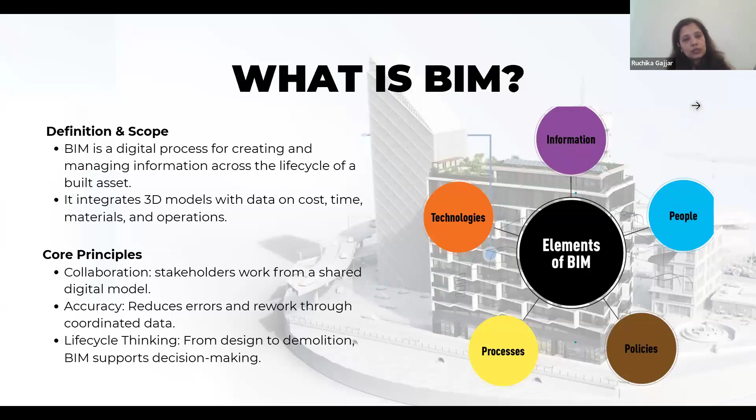There are people who ask, is BIM a tool? Can we buy BIM? Is it just a technology they can plug in and start? No, it is not. It is a process, and this process manages information throughout the life cycle of a project, from the concept to the finishing, or you can say up to the facility management level. It integrates a 3D model with data on cost, time, materials, and operations.

The core principle of BIM is collaboration. In earlier times, as you all from the AEC industry understand, teams used to work in different stakeholder groups involved in the project lifecycle — architects, surveyors, QS, civil and structural engineers, mechanical and electrical engineers, contractors. A number of stakeholders work on a project, and everybody used to work in their silos. BIM is a collaboration tool, or a process, which brings all of them together.

So collaboration is the core principle of the BIM process. Stakeholders work from a shared digital model, improving accuracy and reducing errors and rework through coordinated data. What it means is, when you work in silos, if some changes have been made by an architect and the QS or other team members did not notice, they may be working on a model shared earlier without up-to-date information, and the accuracy is challenged.

There have been times we've come across projects where changes were made in the project lifecycle, but when it reaches the site, the contractor is still using the old model or old drawings. That's when we notice these changes were done, but at implementation time on the construction site, we are not utilizing the correct data, and it brings errors, costs time and money, causes delays, and back and forth issues.

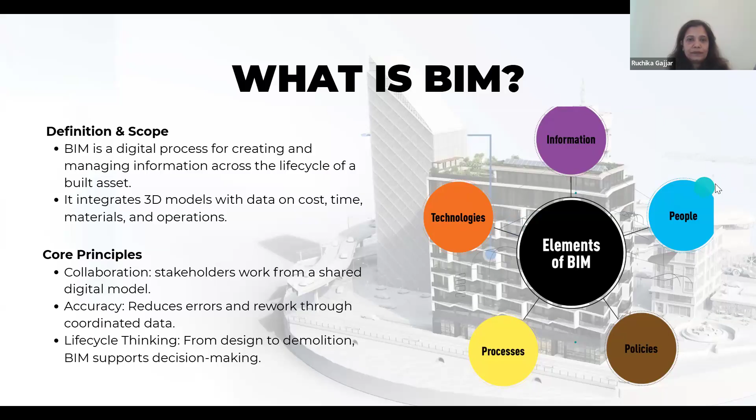BIM's evolution — I'm sure some members here would understand how 2D drafting transitioned when CAD or AutoCAD came in the early 90s, and some of us worked on AutoCAD. So there was a transition from 2D drafting to 3D modeling with integrated data over decades. We are very much familiar with 3D data and 3D tools or modeling now. This addressed inefficiencies and errors in traditional construction practices, and now BIM is a global standard in the construction industry.

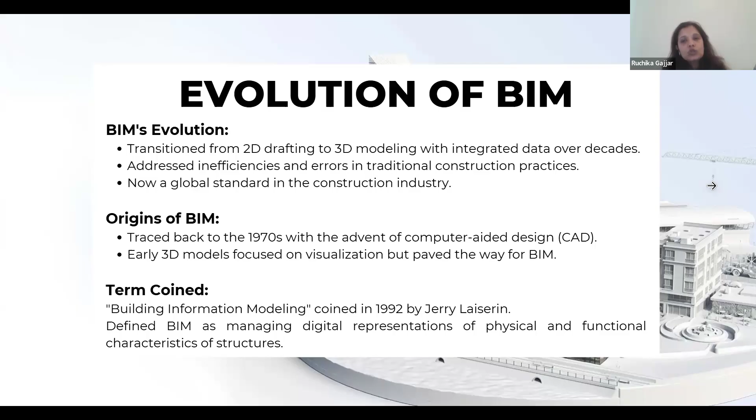The origins of BIM trace back to the 1970s with the advent of computer-aided design, CAD. Early 3D models focused on visualization but paved the way for BIM. What it means is, from 2D we liked the idea of 3D because 3D gave us visualization.

Most of our clientele are non-technical people — the developers, or the people investing, are non-technical — and 3D modeling brought an idea where they could visualize. Whether we are presenting as an architect, or any stakeholder of the project — QS, surveyors, architects, engineers — we all used that 3D model as a very good visualization tool for non-technical people, investors, and developers.

But it paved the way for BIM, because without the 3D model or the 3D tool, we don't start the path of BIM. So 3D modeling was initially key, and then it paved the way for BIM for us at this point in time.

The term building information modeling was coined in 1992, defining BIM as managing digital representations of physical and functional characteristics of structures. We will be explaining that as well. Next slide, Eric.

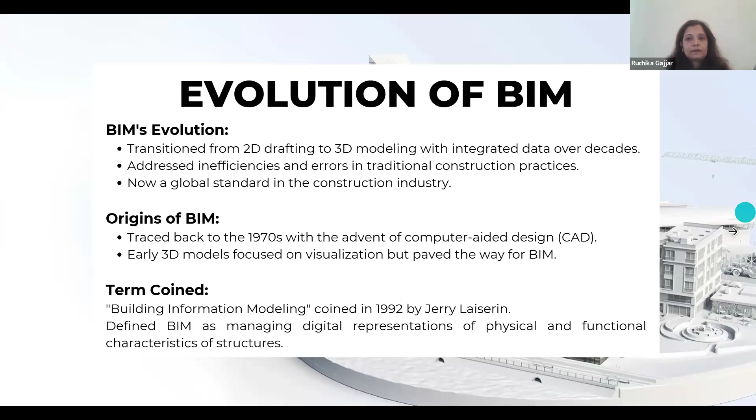Standards and best practices for BIM evaluation. Why do standards matter? They ensure consistency, reduce risk, support legal compliance, and facilitate collaboration across disciplines and organizations.

ISO 19650 is an international standard for managing information in BIM projects. I'm sure you've seen different standards like ISO 9001 and others, these are international standards. For BIM projects, we have the ISO standard, which is 19650. You can always Google it, there's a lot of information available on these standards, and best practice is to understand how it has been used internationally for BIM implementation on projects.

A key concept in ISO 19650 is the information requirement, EIR, employer information requirement. The employer is the person who owns the project. It's very important as a BIM manager to understand the employer, what the developer or investor or project owner requires. The BIM manager plays a role in understanding, since they're often non-technical people, what their needs are, what they want to do, and what the purpose of their project is. We call this the EIR.

We also have AIR, the asset information requirement, and PIR, the project information requirement. These are the information requirements, the standards we follow from ISO 19650.

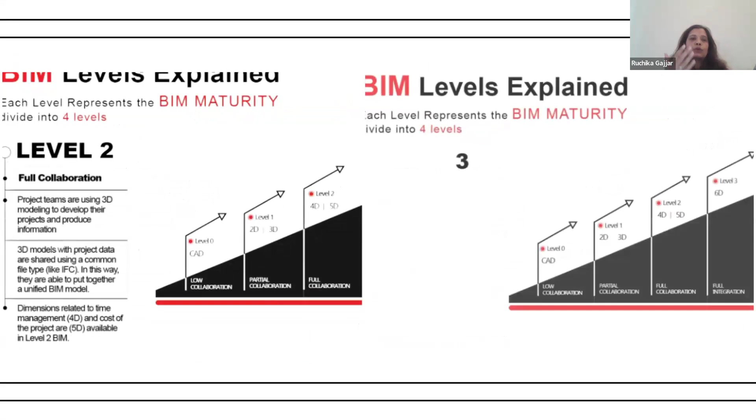All this that I just theoretically explained about the CDE, Dennis will show you in the demo of one of the CDE environments how the work in progress, collaborative, shared folders, and naming conventions are all used.

I think Eric, you've gone ahead. I was on before the slide. Yeah, BIM levels explained, I don't know why.

BIM levels explained. BIM levels refer to the maturity and collaboration stages of BIM. We have level 0, level 1, level 2, low collaboration. Eric, next slide please, I'll be able to explain there.

Level 0, which is low collaboration. Information is produced with 2D drawings using CAD. Files are shared digitally as separate sources of information. Many of us in Kenya are still using this. What does this mean? When using AutoCAD drawings, if you've worked on AutoCAD you'll understand it's a drafting tool, not a design or modeling tool.

In AutoCAD, anything you draw does not have properties. What I mean is a line is just a line, you cannot say that line is a wall, it does not have that property. It's a drawing or drafting tool. At the moment, we are still sharing our drawings through WhatsApp, emails, PDFs, or even Dropbox. That is what level 0 is, low collaboration.

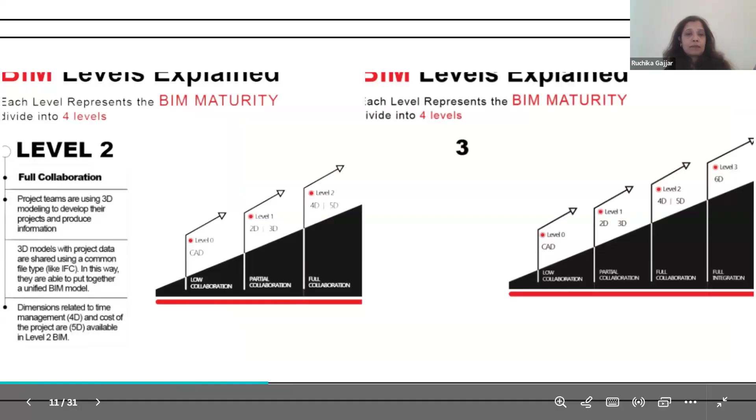Level 3, okay, on the slide somehow it's missing, I don't know why it's distorted. Level 3 integrates all project information, including 4D time, 5D cost, 6D sustainability, and 7D, which is facility management. So these are the BIM levels we have.

Next slide Eric. Now, BIM across the world. We have seen that currently many countries across the world have adopted BIM. We have the US, European countries, and we can see here UK. UK started in 2016, making BIM compulsory for government contracts.

Next slide Eric. So all these countries have already adopted BIM. Some have brought the BIM mandate for government projects, either based on project size or cost. Some countries are working towards BIM mandates and adopting BIM. These are the countries that have so far adopted and successfully launched it on some projects, like Malaysia, where for public projects, above a certain cost threshold, BIM use is mandated.

So that's how they have developed. Even in Africa, we can say Ethiopia is very active currently. They have not yet mandated that, but the Project Management Institute is working towards it. South Africa is currently working on it very actively. The AEC sectors and technology partners are joining in together. Universities are also working towards it. And even in Kenya, we are working on it.

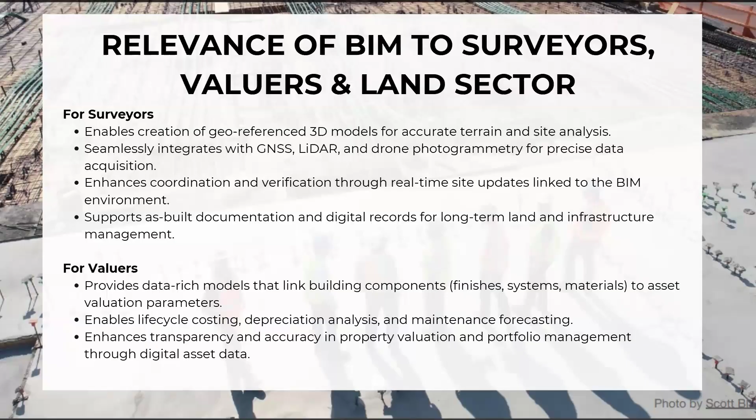Why do surveyors matter? We understand that a project fails without geospatial reference or accuracy. It can look good on paper, it can look good in the design software, but if you don't have the geographical reference, it will definitely fail because you cannot execute it, or there will be a lot of variations and changes on site due to inaccurate geographical references. This is where surveyors come in, providing the designer with the actual geographical accuracy for the project and the location to be executed. We usually see this in Civil 3D and other BIM software as well.

The ArcGIS GeoBIM will also play a critical role. Surveyors ensure correct location by controlling the levels and providing the correct levels even during site execution, which is where we usually get the as-built data as well. Accuracy in the early stage means less rework, lower cost, and faster project delivery. The fastest project is completed on time, and costs are saved, provided the accuracy and integrity have been maintained. So surveyors play a critical role in the early stage by providing accurate data.

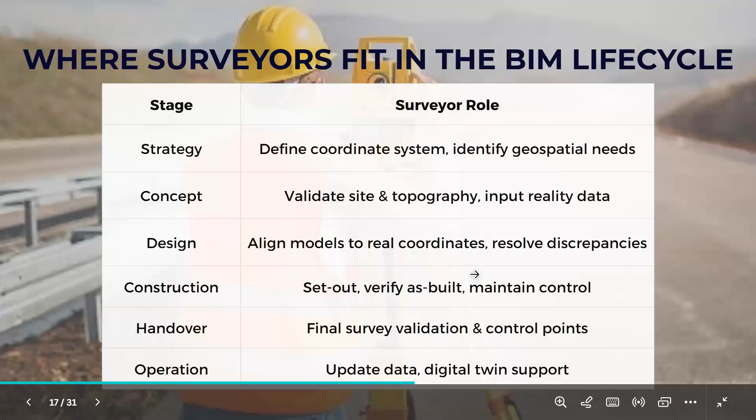At final handover validation, you have to validate the points and also the design versus your geographical reference. Then during the operation stage, as I said, in verifying the as-built, surveyors will also play a critical role in ensuring that we have the digital twin or replica of the existing facility.

In the BIM environment, we usually have a typical workflow which surveyors follow, revolving around data acquisition, data processing, BIM integration, and construction layout verification. This applies to high-end projects and also to as-built and asset information management.

In data acquisition, we conduct surveying, topography, boundary, and cadastral survey using GNSS and LiDAR scanners. That data can be linked into Civil 3D if you have the latest version, 2026, which supports that, and from there it can be linked to the common data environment. We capture high accuracy geospatial data through drones and terrestrial laser scanning, and also import survey data into BIM-compatible formats like ReCap, Civil 3D, and InfraWorks.

In data processing, surveyors help clean and process the point cloud data, for scan-to-BIM, and generate accurate surface models, digital terrain models, and site contours. This helps architects and engineers manage the site and contours for actual georeferenced data, ensuring alignment with architectural and engineering models.

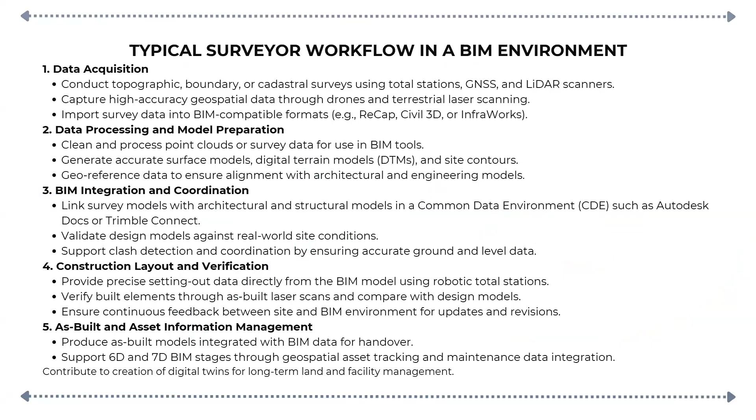When we take a case study from Kenya and the region, we look at Tenwek Hospital, one of the latest postmodern facilities done here in Kenya, in which we will look into how BIM was involved from the initial stage until the final stage, until the handing over, and who played what role in that project.

When we look into Tenwek Hospital, we understand that the Tenwek new cardiothoracic center used an international design team and BIM for the architectural, structural, and MEP coordination. Local execution included adaptation to site conditions.

We know that this project exists here in Tenwek, and we know that it's a cardiothoracic center. The funny part is that it was designed outside Kenya, or abroad, usually from the US at the initial stage, and the surveyors played a critical role in providing the actual geographical reference for that location for the designing teams in the US to do their preliminary design stage.

As we talk of BIM, the team didn't travel all the way from the US to come to Kenya and do their site verification or to know the actual site where the project exists. But with the help of BIM, they were able to deliver a project which came to success and is now a successful story here in Kenya.

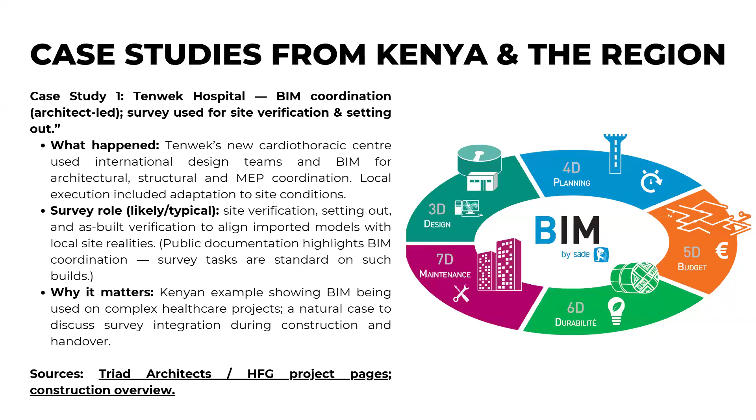Another case study comes from Konza Technopolis - Survey of Kenya establishing controls to enable BIM and GIS integration and future digital twin. Konza is Kenya's smart city, as we all know. Survey works, which involve the cadastrals and control networks, have been carried out by the Survey of Kenya to provide a reliable geospatial foundation for master planning.

The program is explicitly aimed to embed digital infrastructure and digital twin concepts, whereby the surveyors, from the initial stage, provided the cadastral and control networks for the designing team, ensuring the success of Konza City planning. The main roles include establishing horizontal and vertical controls, and cadastral engineering surveys that will enable future BIM and GIS integration and digital twin development.

Why it matters for us: this is an example where national land surveying underpins city-scale BIM, GIS, and digital twin ambitions, and serves as a strategic example for early survey involvement. These case studies help us understand the critical role surveyors play in BIM and the AEC industry, how BIM is being integrated with ArcGIS GeoBIM, and the digital twin ambitions, whereby a planned facility can have a digital replica of it.

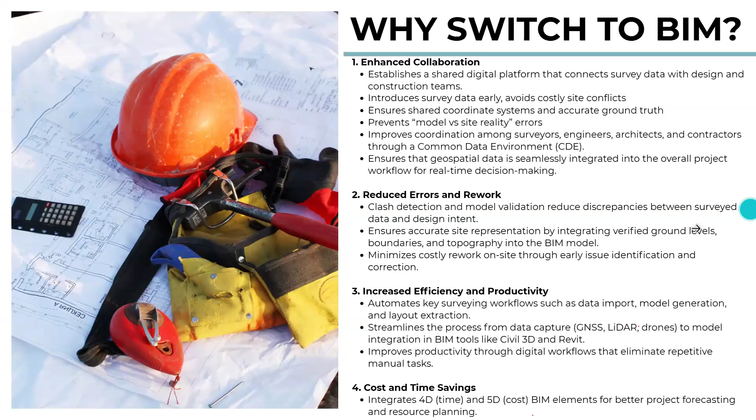Cost saving, as I said, from the reduced errors and rework and the collaborative nature, they will be able to deliver projects within the shortest minimum time with the highest accuracy, and that means we will save on cost and time. And you know how you can utilize that extra time and the cost saved on other projects to have a high return on your investments.

Improve decision making. As we've seen from the case studies, let's say from the Tenwek, we have various stakeholders from various places, but with BIM, we are able to make a decision in the early stage that this project will fit in this given location. Not that the client tells you the plot size, and then you as a designer start to design, but when they go to the actual site, they find it's quite different, so that calls for rework as well. But now with BIM, we have improved decision making, and we are certain that the decision we are making for the implementation of the project is accurate.

Sustainability and life cycle management. BIM supports sustainable land development through precise spatial analysis and resource mapping. The 6D and 7D BIM link geospatial and asset data for effective facility and infrastructure management.

Alignment with international standards - we have ISO 19650, mainly for information management. And as a surveyor, or as someone who is qualified with the skill within BIM, you will be able to work not only on projects within the national level, but the skill can be exported to the international level, whereby you can compete effectively with other competing firms or stakeholders for a given project.